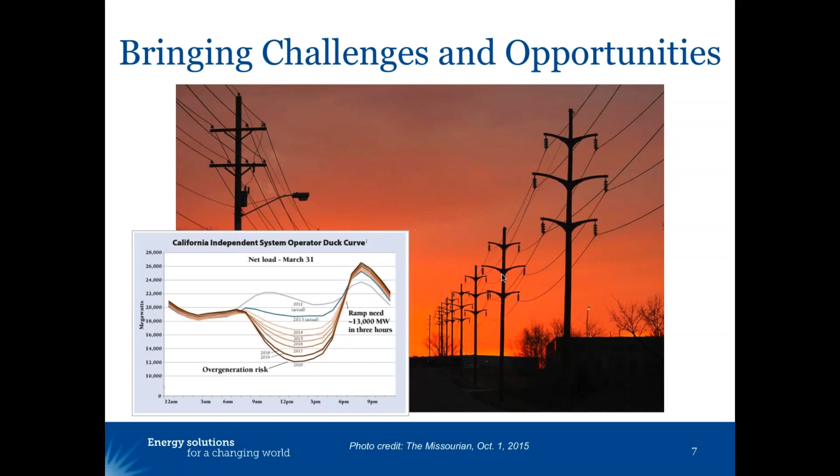Second, we all recognize that along with these opportunities, the electricity grid faces increasing challenges, including integration of distributed energy resources, or DERs, as illustrated in the California ISO's famous duck curve. But as Jim Lazar's Teaching the Duck to Fly papers show, electrification can provide new ways to help meet these challenges.

Finally, the critical environmental importance of electrification is evident in the fact that virtually every major study or roadmap to address the threat of climate change has reached the same conclusion, that increased electrification is necessary for deep decarbonization.

But not all electrification is created equal, which begs the question, when is electrification beneficial? We consider a project or a measure to represent beneficial electrification if it meets one or more of three criteria without adversely affecting the other two. Those are, it saves money for consumers over the long run, it reduces environmental impacts, and it enables better grid management. Let's look briefly at each of these three criteria.

Saving customers money in the context of beneficial electrification means that over its life, an action results in a total lower cost to provide the energy end use, the heating, the mobility, and so forth, to the consumer, as long as that's done over the long run, not the short run, includes the cost of acquiring and maintaining the appliances or vehicles or so forth being electrified, includes any incentives that may be provided, and also includes utility bill savings from any time of use or ancillary services benefits that the measure creates.

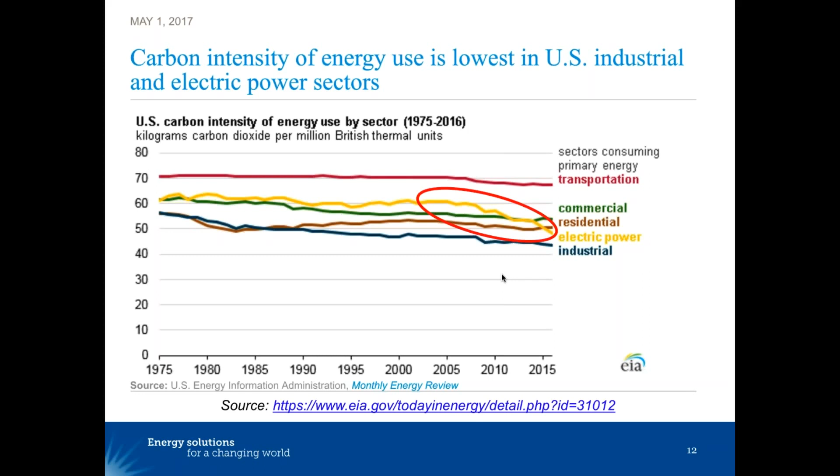Regarding environmental impacts, it's important to note that beneficial electrification measures get cleaner over time as the grid gets cleaner. This EIA graph shows how the carbon intensity of the electric power sector has improved dramatically over the last decade.

Third, beneficial electrification also improves the grid operator, giving him greater flexibility to manage load, improve demand response, integrate higher levels of renewable, non-dispatchable generation. This can occur if some or all of the load can be controlled by the grid operator, such as through grid-integrated water heaters, smart thermostats, or controlled water pumps.

Consumers can program their loads to take advantage of time-varying rates. That's another way. And if the load shape of the measure, by its very nature, fits the output of low-cost resources, like street lighting load, which largely occurs off-peak.

Some utilities and regulators may look at electrification simply as load growth, but we believe that smart utilities can get a leg up by approaching beneficial electrification consistent with these three criteria. RAP coined the LEG UP acronym to reflect additional load and more service opportunities and lower costs for consumers. The E is the lower environmental impacts, and the G, of course, better grid management.

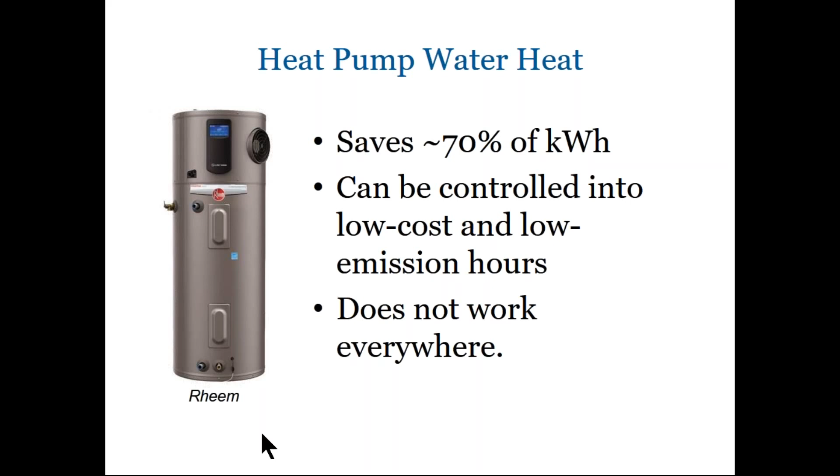Good. Yes. All right. I'm going to go through some quick examples of things that fall under the category of electrification and generally beneficial. The first is converting from electric resistance water heat to heat pump water heating. This saves about 70% of the kilowatt hours, and the heat pump water heater only needs to run 2 or 3 hours a day to provide a day's worth of hot water, so it can be controlled into the low cost and low emission hours. But they don't work everywhere.

The next is oil or gas space heat to heat pump space heat. Oil and gas heat are 60 to 95% efficient. Heat pumps are 200% efficient in colder climates, 300% in warmer climates, and can provide significant net energy savings.

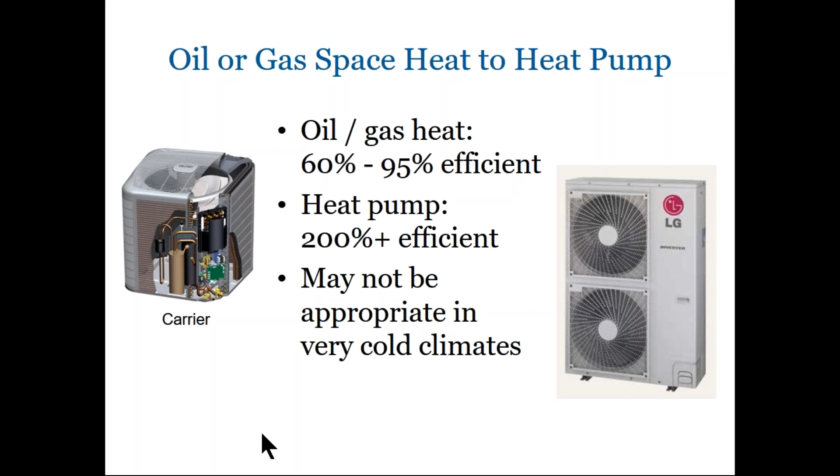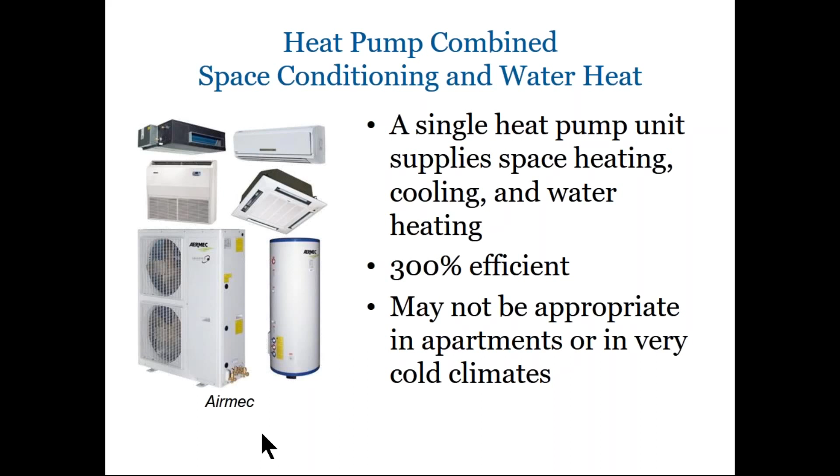Another device that's becoming available on the market is the heat pump combined space conditioning and water heat system, in which in the summer when you need air conditioning, the heat pump is taking heat out of the house and putting it into the water heater. So one heat pump provides both your heating and cooling, but also your hot water. And this won't work everywhere either, but it's a terrific system.

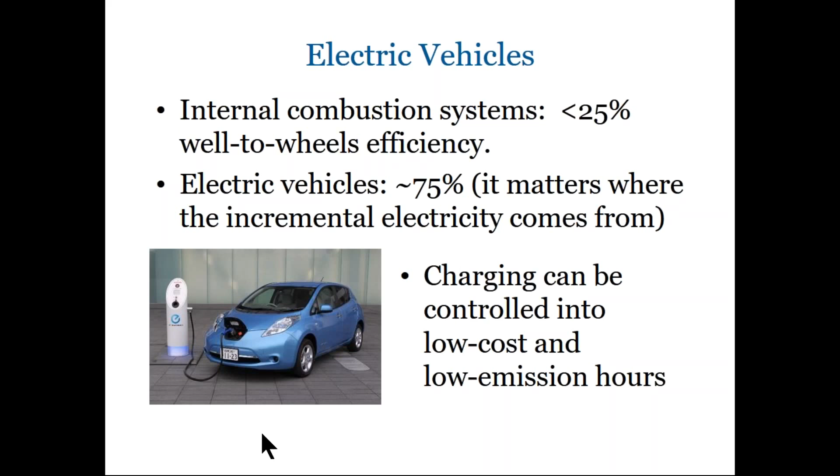Next, and Ken mentioned this, electric vehicles. Internal combustion systems are less than 25% well-to-wheels efficiency, simply because internal combustion engines aren't very efficient. Electric vehicles are more like 75% efficient from the plug to the wheels, but it matters quite a bit where the electricity comes from. Because EVs only need to charge 2 or 3 hours a day, they can be controlled into the low cost and low emission hours of the day.

Now there's a more challenging one, converting gas or propane or oil water heat to electric resistance water heating. As I'll show, this can be a beneficial electrification move if done right, if the grid is a low carbon grid. Because the water heaters only need to run 2 or 3 hours a day, they can be controlled into the low-cost hours. They can also provide ancillary services to the grid.

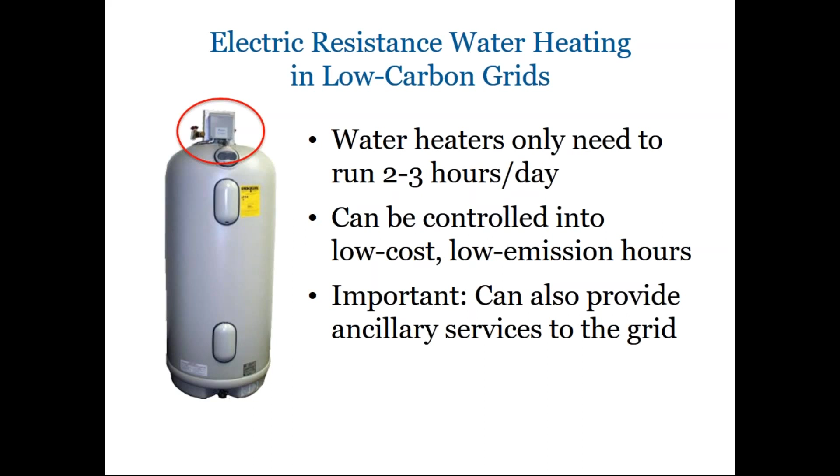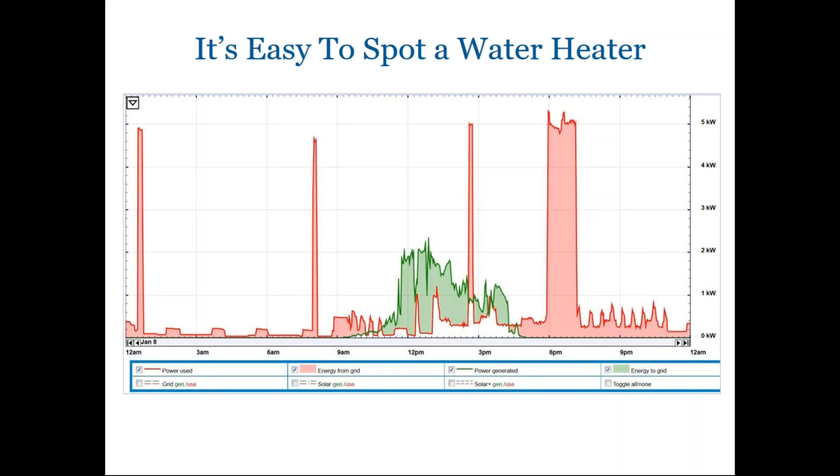The green is the output of the solar system. This is on January 8th, so there's not much. The 4 big red spikes are the water heater coming on, a telltale 4.4 kW jump in consumption. As you can see, it doesn't run very many minutes of the day, and because the tank holds a day's worth of hot water, these can be scheduled into the low-cost, low-carbon hours of the day.

No, you don't run out of hot water under controlled water heating. This is a 50-gallon tank in a condominium in Hawaii, so a relatively small tank. It wakes up in the morning full after charging from 1 in the morning until through 6 in the morning. They're in red. People use hot water in the morning and draw down the storage in the tank.

And then once the sun comes out and solar systems are producing excess electricity in Maui, the water tank charges back up again, and as the sun comes down and people come home and start using hot water again at the end of the day, the hot water is drawn down. At no point is this tank below 50% charge. So if the tank is sized right and the controls are operated carefully, feeding power to people who need power if their hot water use increases, you don't run out of hot water.

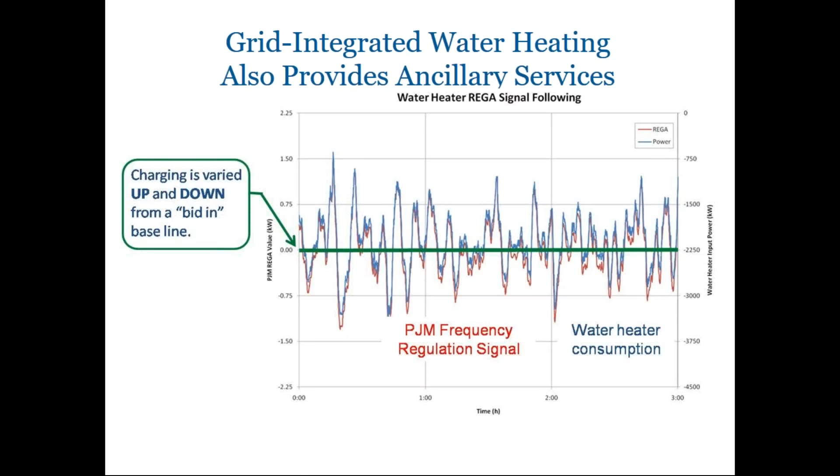Now, the ancillary services function is extremely valuable to the grid. This graphic shows in red the PJM frequency regulation signal, and in blue a fleet of electric water heaters being turned on and off in order to support the grid, turning off when the frequency sags, turning on when the frequency surges. Water heaters can respond faster than any power plant can do in supporting the grid with frequency regulation services.

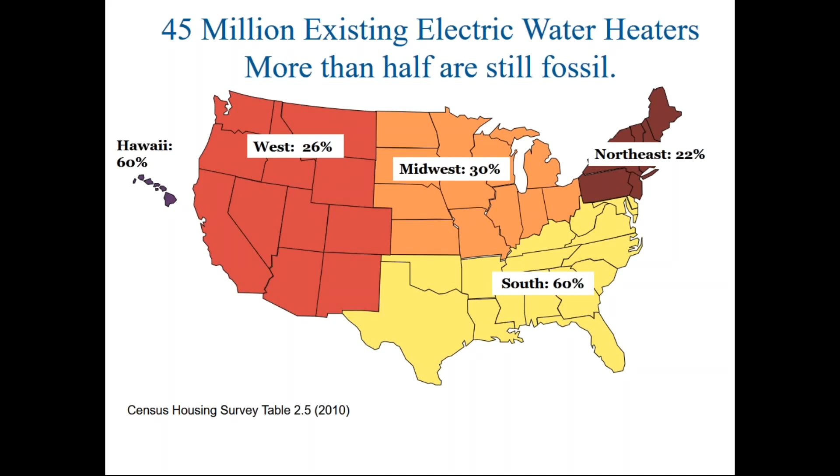Now there's a lot of existing electric water heaters in the country, as much as 60% in the South, about 45 million. But more than half of the water heaters in the US are still fossil. This means there is a huge potential for water heat to provide benefits to the grid. Each water heater can provide the shaping and storage needed for about 2.2 kW of wind or solar, taking whatever power they produce at times that is inconvenient to the grid.

With 45 million existing electric water heaters that could be converted to grid integrated water heating, that would enable adding about 100,000 megawatts of wind and solar to the grid. If we converted the 66 million gas, propane, and oil water heaters, that would enable another 140,000 megawatts of wind and solar. When power comes in at valuable times, it would go to other purposes, our lights and computers and so forth, and at less valuable times, it would be directed into the water heaters.

Today's wind and solar is only about 85,000 megawatts, so this would allow us to more than quadruple the amount of solar and wind in the United States grid. I'm going to pause here, Nancy, if there's clarifying questions at this point before I go into some more detailed numerical stuff.

Okay, yes, Jim, actually there are two clarifying questions for you. Let me ask them one at a time. One is, what would you say is a very cold climate? Do you think of New England, for example, that way, or the upper Midwest? Certainly, you know, Vermont and North Dakota and eastern Montana are very, very cold climates, and those are areas where heat pump technology works least well. Basically, if you have more than about 7,500 heating degree days, I'd classify that as a very cold climate. There are new heat pumps that are coming to market that perform better at those temperatures, but you won't get the same performance you'll get in Georgia or California.

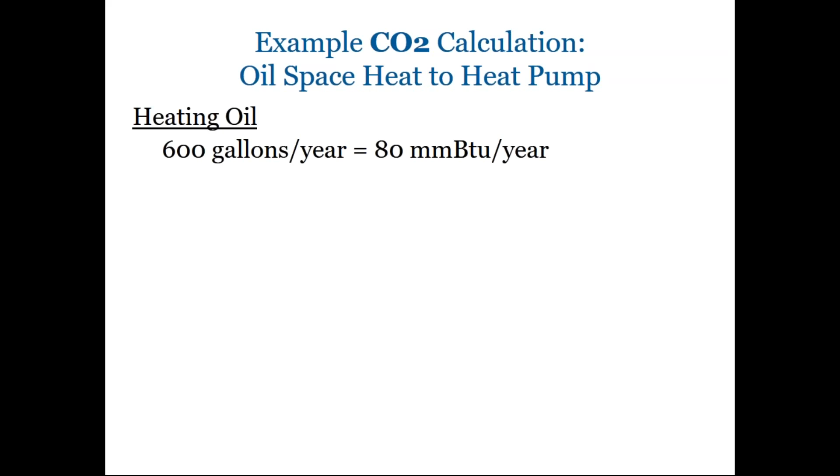If their older oil furnace that needs to be replaced is at about 75% efficiency, then they're getting about 60 million BTUs into the heated space. And that's about what my house uses a year in BTUs. So if we figure that out, that's 6.4 tons of CO2 emitted by the oil. If instead we install a heat pump, and it's a warmer climate calculation, with a coefficient of performance of 3, typical of Energy Star heat pumps today, that customer is going to need 6,000 kilowatt hours a year.

If it was coming from a grid that's 100% coal, it's a minuscule or negligible improvement. But if it's coming from a grid that is anything cleaner than that, say 100% gas, it's about a 60% reduction in CO2. And every grid in the United States is less than 100% coal. It's kind of a worst case. So we're going to say, yes, this meets the lower carbon criteria.

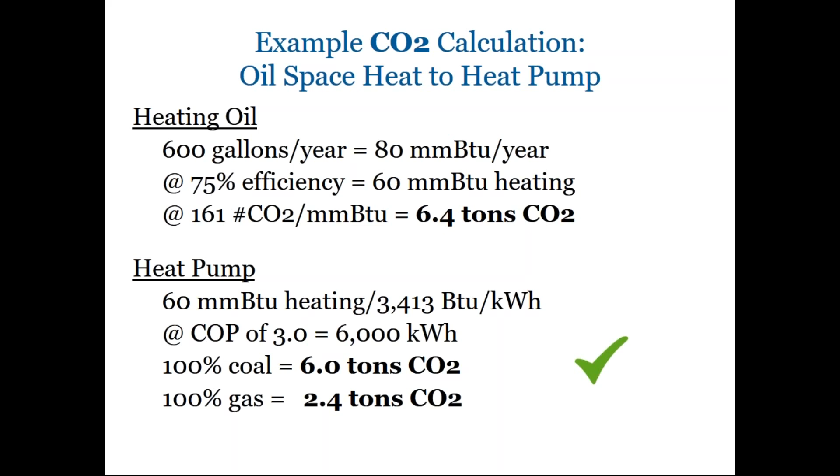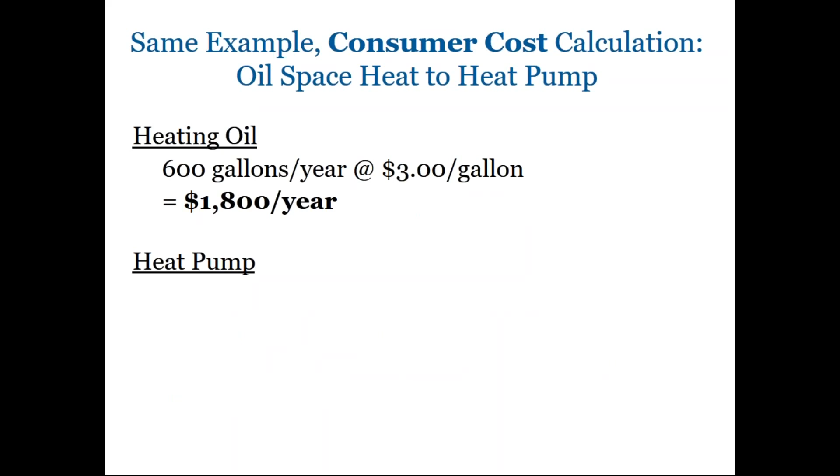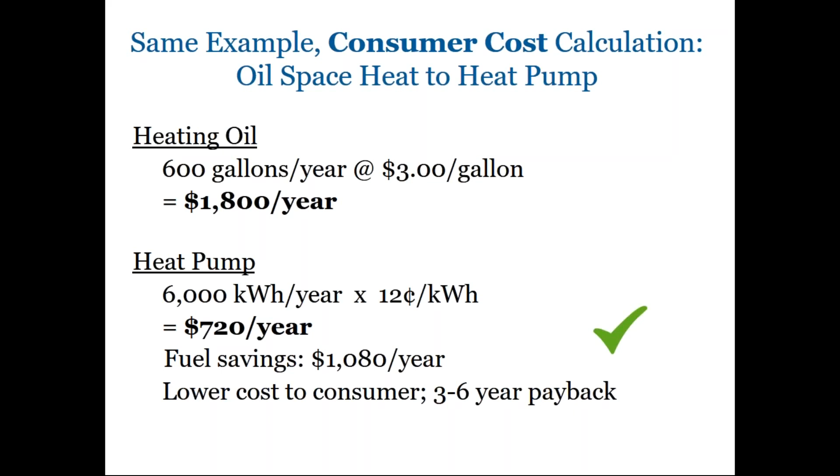But what about the cost to the consumer? This is also important. The heating oil was costing that customer $3 a gallon or $1,800 a year. The heat pump, 6,000 kilowatt hours at the national average residential rate of about 12 cents, $720 a year. So this customer is saving a little over $1,000 a year and can pay off the heat pump conversion in 3 to 6 years. So we're going to say, yes, this meets the cost to consumers criteria.

Now, the electric system fuel mix that's being used to serve electrified loads is changing over time. I'm going to give one example for Los Angeles Department of Water and Power, the nation's largest public power utility, that has published its system resource mix expectations very clearly. In 2013, it was 42% coal and had emissions of 968 pounds per megawatt hour, about a pound of CO2 per kilowatt hour. By 2020, the coal will be cut in half, the renewables will increase, and it will be down to an estimated 588 pounds a megawatt hour.

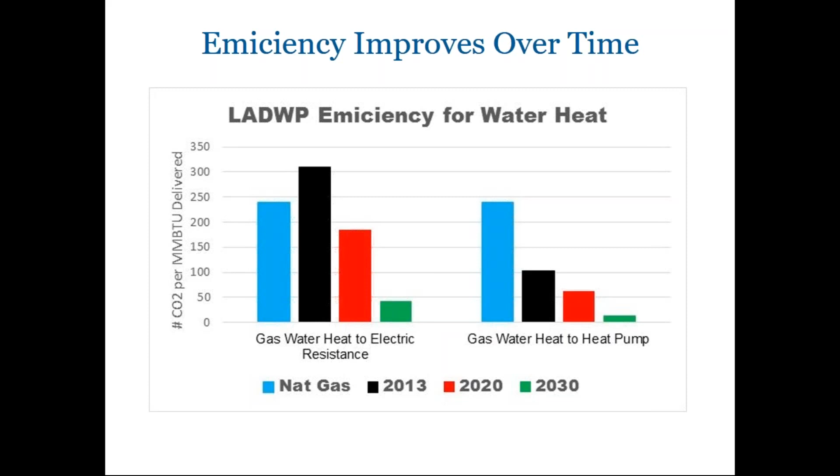Now, rate design matters a lot to the consumer cost effectiveness calculation. I'm going to give an example for electric vehicle charging. Southern California Edison, one of the nation's largest electric utilities, has a standard rate that is a 3-tier inclining block rate.

Almost everybody uses their first tier for essential needs, refrigerator and lighting and televisions, things like that. So any additional consumption for the consumer would occur in tier 2 or tier 3, and they'd be paying 25 to 31 cents a kilowatt hour. Really not much savings over the cost of gasoline.

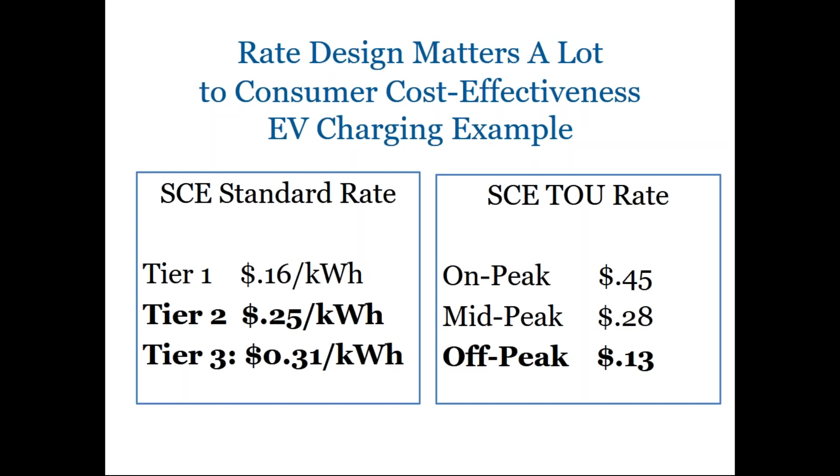But SCE also offers a TOU rate, and a TOU rate has an off-peak rate of 13 cents a kilowatt hour. This is a rate that will save the electric vehicle owner 50% compared to the cost of gasoline. The time of use rate is a good option for the EV customer because they can control when the EV charges. If off-peak is defined as the middle of the day, they can charge it in the middle of the day. If off-peak is the middle of the night, they can charge it overnight. All electric vehicles include charge controllers.

Now, we are seeing some very, very interesting new technology emerge. And it's really quite promising in some areas. I'll illustrate the ultrasonic clothes dryer recently announced by U.S. Department of Energy in cooperation with one of the largest appliance makers. It uses sound waves to shake the moisture off of our clothes instead of heat to evaporate the moisture from our clothes. It produces about an 80% reduction in electricity consumption compared to a conventional electric dryer.

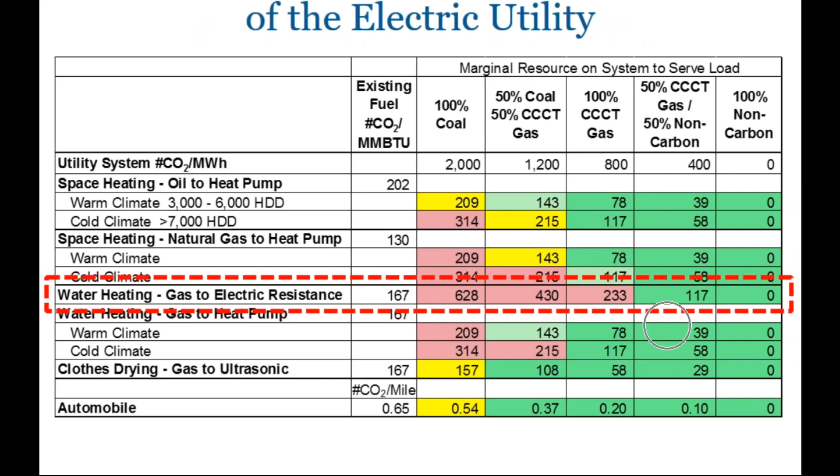The whole issue, I think, of determining when a measure is beneficial sounds complex, particularly in learning your system, but the actual implementation of policies associated with it, I think, is not difficult because it gets to the simple kinds of codes and incentives and rate designs, time of use and so forth that Jim mentioned. It's knowing what to aim at. It's a better form of targeting more than it is a whole different policy palette. Thanks.

Ken just prompted me to think. The city of Palo Alto, California is probably a leader in this area. Palo Alto has a municipal electric utility, but also a municipal natural gas utility. And their electric utility is very much at the clean end of the spectrum already. It's essentially coal-free. It has a lot of hydro. It has a lot of wind and solar, and it has natural gas in efficient power plants as its swing fuel.

And they are studying, in essence, over what period of time should we phase out natural gas service. The studies show that they can't get to their carbon goals with natural gas as a space and water heating fuel. So over some time, they're looking to convert substantially all of at least their residential natural gas loads off of fossil fuels. Nancy?

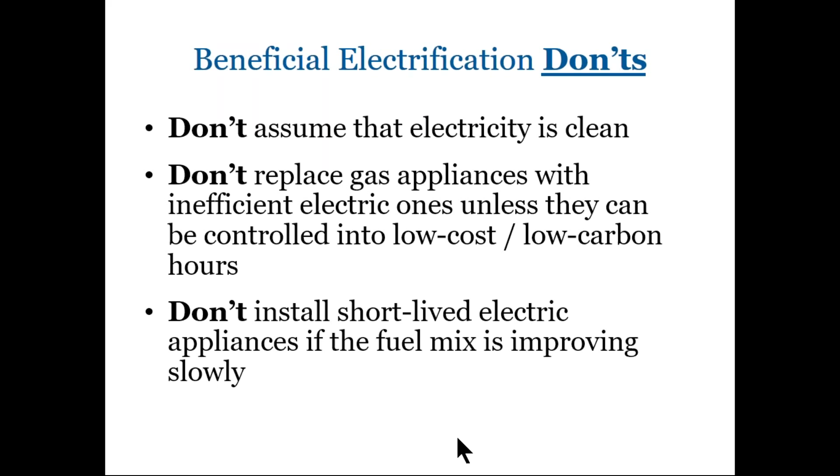And then finally, don't install short-lived electric appliances if the fuel mix on your system is improving only slowly. That means that the devices will likely reach the end of their life before your system shows material improvement. By way of conclusions then, before we turn to the extra 30 minutes of questions, let me just wrap up that electrification is happening. It's happening rapidly due to advances in technology, but there are better and worse ways to do it.

When done correctly, beneficial electrification can deliver multiple societal benefits. And that is if it adheres to the three criteria that we mentioned: lower total cost, lower environmental impact, and better grid management. In addition, if it applies the emiciency metric that we've been talking about throughout this webinar and follows prudent do's and don'ts. Finally, remember that beneficial electrification does not take the place of energy efficiency. A good way to conceptualize the two is working hand in hand.

When you undertake energy efficiency efforts, you can use the resulting energy bonus of saved kilowatt hours to electrify another end use. The ultimate point in the last bullet is to utilize less raw energy, what we call joules, to accomplish the end uses that society wants. This is trending toward being most effectively accomplished when more of those joules are in the form of electricity. That's what beneficial electrification is.

Now, back on November 3rd, Jim and I did an introductory webinar about beneficial electrification with Keith Dennis of NRECA, the National Rural Electric Cooperative Association, who has done pioneering work on beneficial electrification. Here in this webinar, we've tried to mention how to measure, how to think about, and provided examples for beneficial electrification. We recognize that our conclusions in today's webinar and these do's and don'ts are pretty general in nature, and RAP will be working over the next several months to develop and clarify specific policy recommendations.

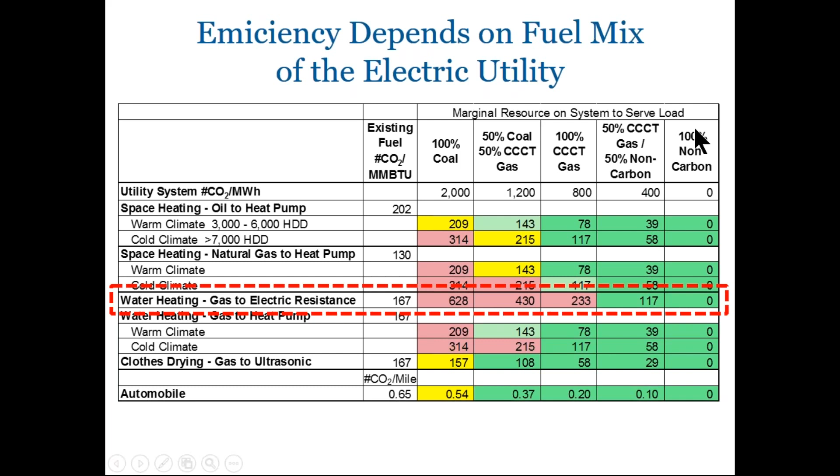Okay, so we just have about 3 minutes left, and I thought I'd give you both an opportunity, if there was a question you wished you'd been asked, or some of the other questions raised, that you'd like to add. I don't know if one of you wants to go first. Go ahead, Jim.

Great River Energy, which Ken mentioned, has about 1,000 megawatts of water heaters under grid operator control now. The electric utility in New Brunswick, Canada, as part of the PowerShift Atlantic program, began installing grid integrated water heaters in their water heater lease program. PJM, I understand, has contracted for a fleet of about 30,000 grid integrated electric resistance water heaters primarily to provide ancillary services to the grid. And Hawaii has a couple of pilots underway, and I'm hoping we'll be moving to a full deployment into the multifamily housing sector where solar water heating is not really an option.